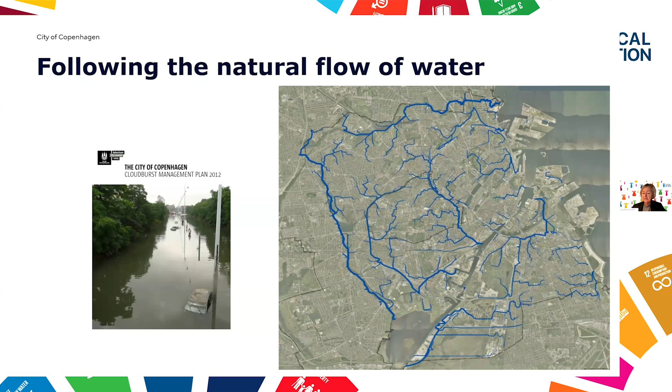And the solution for us was a combination of gray, green, and blue solutions, by mapping and modeling how water actually flows on the surface. So the map you see on your right side is not a map of streams and rivers in Copenhagen, but how water will flow in case of a heavy cloudburst over the city. Based on that, we divided the city into catchments and did a detailed plan, and a lot of that was about how we manage water on the surface.

Because if we're not just using the sewers, we need to work with different solutions. We need places to store the water, mainly upstream, delay areas. We need to slow the water coming down from upstream. We need to transport water, and in our case, both for slowing the water down and transporting it, we are actually looking at using roads for that, and also having rain gardens along smaller streets and so on, so that can also manage water locally.

And finally, there's no doubt that you sometimes have to go underground in a city. There's a lot of existing infrastructure that you cannot just remove in order to manage all of this.

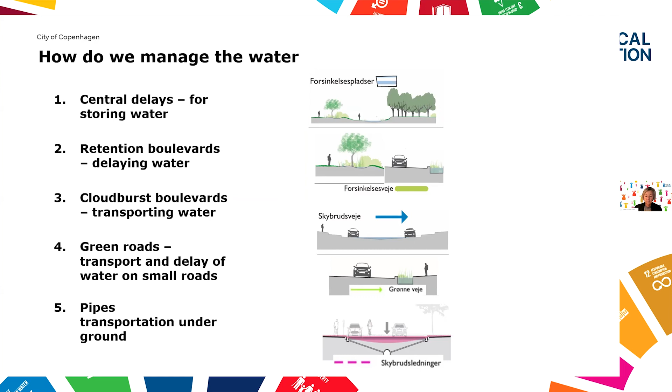The other thing that was really important for us was that we wanted to look at how we can use climate adaptation to make a better city: more recreational value, more biodiversity, meeting places for people, improved health, improved microclimate. These spaces that we're creating for the management of water, how can they also be used to create a better life for citizens, especially when it's not raining and they're not being used for stormwater management functions.

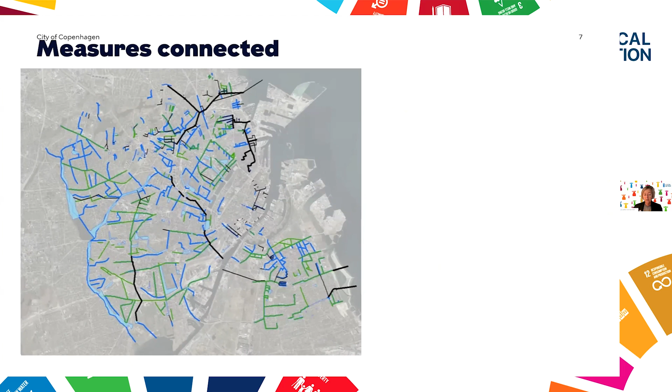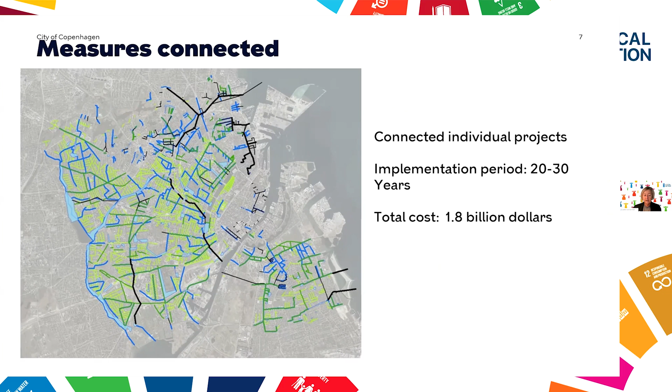So if you look at it, here are some of the big tunnels, smaller underground projects, cloudburst streets, retention boulevards, storage areas, and green streets. All in all, it adds up to this connected system that will take 20 to 30 years to implement and cost—here it says 1.8, but I actually think the amount now is closer to $2 billion. Still, it's a system that will make the city more resilient to future heavy rain events.

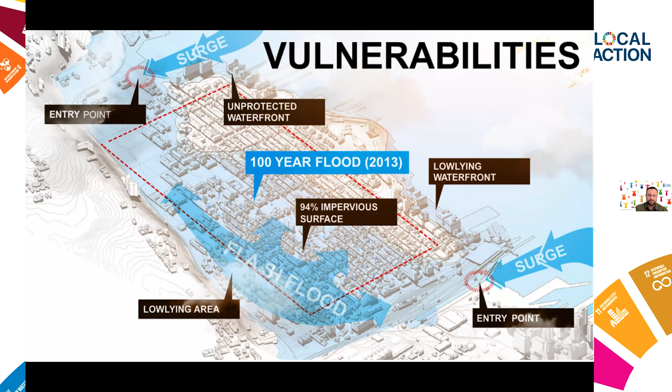In addition to the geography, topography, and hydrology of the city, we had to look at how much our property owners were paying for insurance. How well did insurance cover actual flood damages? What was the value of properties in the floodplain? This analysis helped us understand the true cost of flood risk in Hoboken and allowed us to right-size interventions that pass muster with a benefit cost analysis.

You could spend billions and billions and billions of dollars to solve the problem, but it would come at the cost of basically rebuilding the entire city, disrupting quality of life, and maybe not even addressing the full scope of risk.

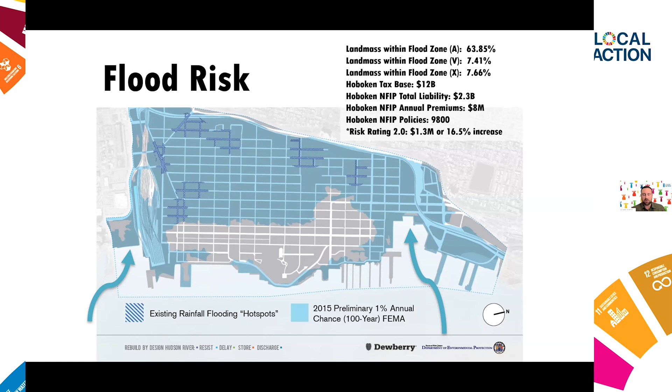So after we looked at the value and flood risk, we developed, through a design competition called Rebuild by Design, a 4-part water management strategy to address our unique challenges. We called the strategy Resist, Delay, Store, and Discharge. That's some of the language that was already used in the last presentation, and we had to use analogy to simplify or describe a very complex project that we were about to undertake.

So Resist involves creating barriers like seawalls, gates, and levees that are embedded into urban features. And then Delay was, we want to keep water from overwhelming our combined sewer system, which means intercepting and managing stormwater before it enters the sewers during a flood event.

Store, using our parks as part of the solution, what we call a parks as defense strategy, we've created stormwater detention tanks and green infrastructure to store excess water during rain events. And Discharge, by building pumping stations, we can actively move stormwater out of Hoboken to more efficient places, or discharge to the Hudson River when flooding does occur.

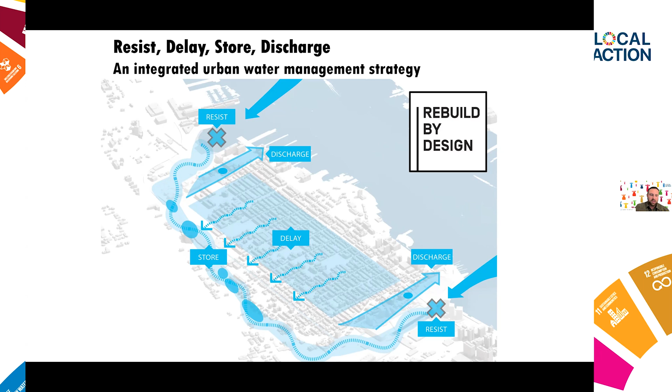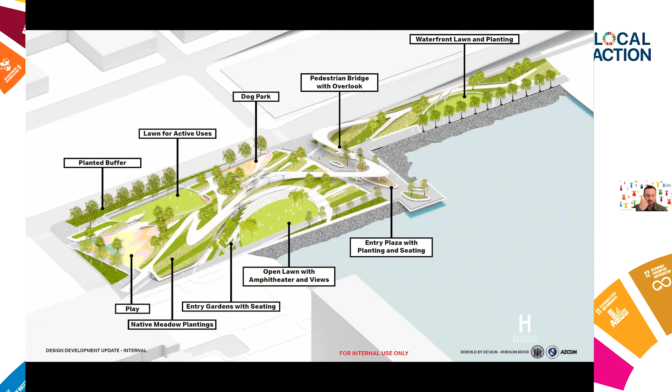So what you'll see is an amphitheater, a dog park, a playground, but what you don't see beneath this park, we've embedded seawalls, gates, and other coastal storm surge interventions. We try not to use the term walls because that tends to frustrate and animate the community. This project is still in construction, but I'll show you an image from right across the street. I think the point is this isn't just landscaping that we're doing.

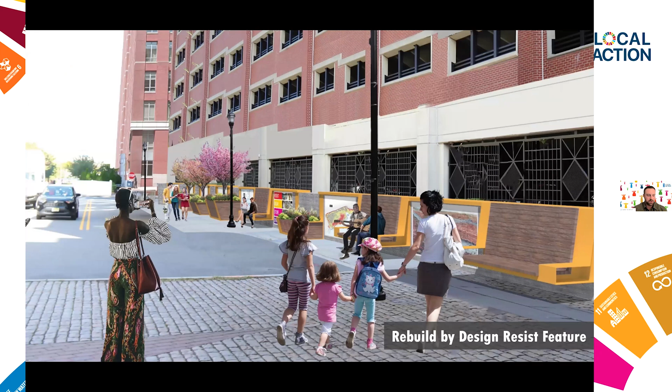This is traditional pouring concrete, adding rebar, increasing elevation so that the topography changes. But at the end of this, the features will look like seating, art, landscaping across from a school, and it hides that infrastructure underneath it.

The one thing to note is that the reason our community chose an inland alignment is because it preserved access and views to the water while also reducing coastal flood risk to 90% of the community.

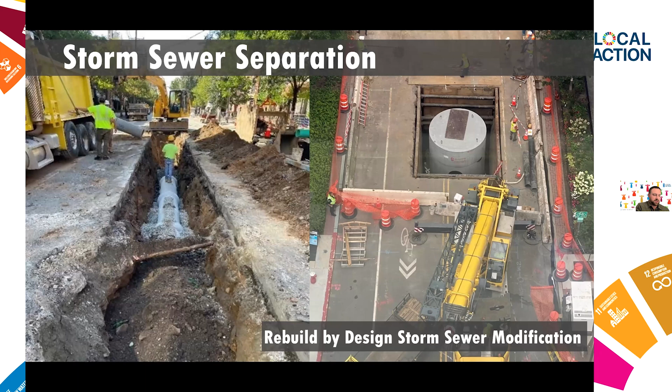The next part of this presentation, I want to shift to how we're dealing with rainfall management. We couldn't modify the entire storm sewer system, but we did separate parts of it, restoring natural flow paths back to the Hudson River. That prevents overland surge from supercharging and flooding areas that would be landward of our levee system.

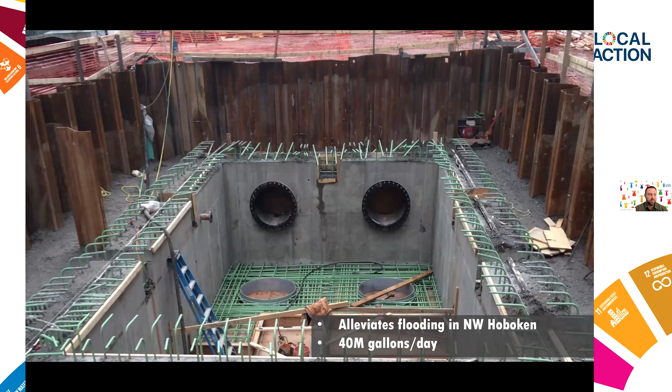I asked about pumping stations because it's core to our strategy. We built multiple pumping stations to help keep Hoboken dry by moving water out during storms. Unlike traditional watersheds with natural waterways, Hoboken sewer sheds rely on these pumps to handle the majority of storm water within city limits during these cloudbursts, or heavy precipitation, it's all the same thing.

This is a 40 million gallon per day pumping station. This was our second. Our first was a 50 million gallon per day pumping station. And this is an example of our discharge strategy.

One of our first projects was Southwest Resiliency Park. This can hold 200,000 gallons of stormwater with above ground green infrastructure, porous pavement, and a below ground detention tank. This was our first try at doing those delay and store initiatives as part of our comprehensive water management plan.

The next project, we did double down on that. This is just one of the blocks, it's actually 2 city blocks, and this can handle 400,000 gallons. It's the same delay and store strategy to keep water off the streets and to reduce flood risk at homes.

Hoboken doesn't incorporate as much of the street scale because our topography is very low. We're maybe 4 feet above sea level, but our groundwater is also very, very high, meaning groundwater might be 2 or 3 feet below ground. So the practices for us to either depress or store have to compete against historic fill or contaminated soils or other infrastructure, but it's difficult for us to depress on grade to get more capture, which is a more cost-effective strategy.

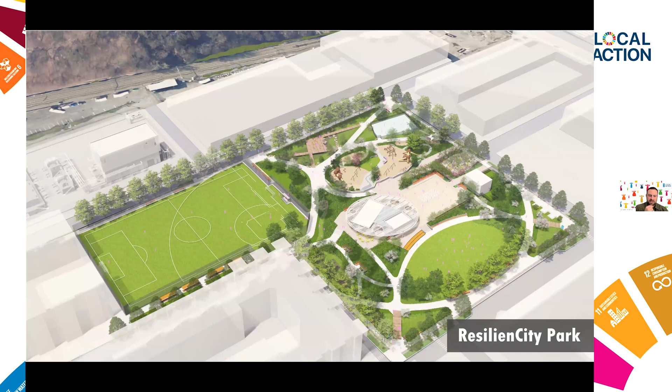The project I want to highlight is this 5-acre project, ResilienCity Park, and it takes stormwater management to the next level, combining delay, store, and discharge. It detains 1 million gallons of water on the surface and 1 million gallons below ground.

We're achieving blue sky performance, meaning that our projects augment existing social and cultural values in a way that wouldn't be possible if we only did engineering practices below ground. What looks like a series of disconnected green infrastructure on the surface, shown in dark green, is actually a series of connected active infrastructure below ground, with the tank and our pumping station. The surface is delay and partially store, and the subsurface is store and discharge.

And this is a clean water project, so it's outside of our combined sewer overflow area, because we're disconnecting the watershed around this to direct water to the site.

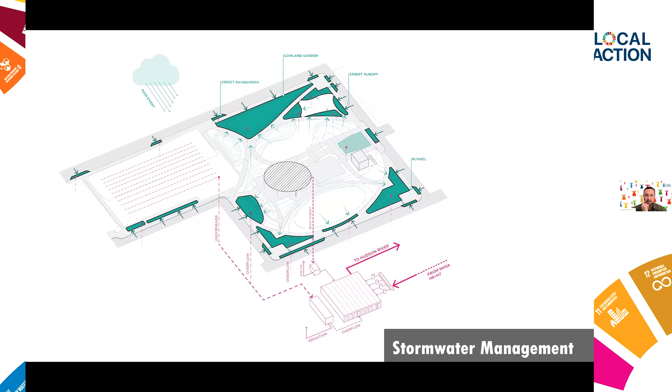We're able to accommodate more than 90% of rain events. News crews come to Hoboken to see what happens for flooding, and the good news is we're not flooding as much anymore. During Hurricane Ophelia, we actually hosted our cultural event, the Arts and Music Festival, and we're seeing success in the interventions we've been able to site.

I just want to say thank you for the opportunity, and I'm really excited to have the conversation. I feel like I spoke a lot about the different things that Copenhagen was doing, because it's practices that work, and we're trying to borrow from different applications around the world. I just want to say that even if you're a small community trying to undertake these big interventions, you can do that at a different scale, but one that has impact.

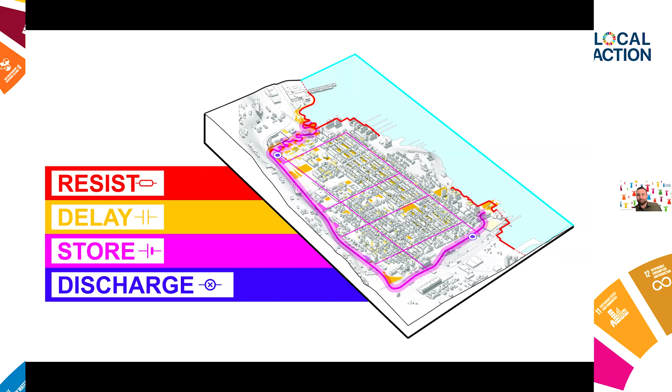Thank you, Caleb. And good job on 90% success rate managing these floods. I actually have a friend in Copenhagen who's from Hoboken, a Hobokenite, and I found this out last week. She mentioned that during Hurricane Sandy, the whole city had a really strong smell, and it was very challenging to get back to normal. So these solutions are very interesting.

Luke, would you like to ask Caleb a question before we move to Q&A? Yeah, I would. Your presentation had two parts: coastal flooding and stormwater flooding. In the US, big rain events often follow hurricanes, so what are your thoughts on a combined event of cloudburst and coastal flooding? We're working hard to make sure that over time we're able to get the water out, even though natural outlets like streams basically block when the water outside in the harbor is high.

The city was already working on rainfall issues. Hoboken is basically a bathtub—high tide is at 4 feet, and our city is at 4 feet. The interior drainage, or delay, store, discharge, relies on pumping stations because we're already at the point where sea level rise is impacting the capacity of those systems to move water. Basically, our outfalls are below high tide 50% of the time, so the interior drainage and pumping stations are how we overcome that higher tide.